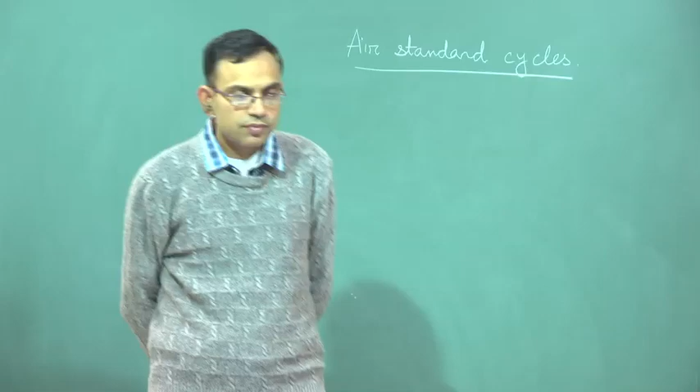So we will start with air standard cycles. Before understanding what these are, I will try to give you a practical example in engineering, and this example concerns something called an internal combustion engine.

IC, for internal combustion. So let us imagine that there is a cylinder with two valves, and then there is a piston. Piston cylinder arrangements have been discussed in detail in this course, so you are familiar with this, except for the fact that this cylinder has certain provisions for taking in and throwing out the fluid contained within it. So it is a cylinder in which the mass of the fluid being circulated can be variable.

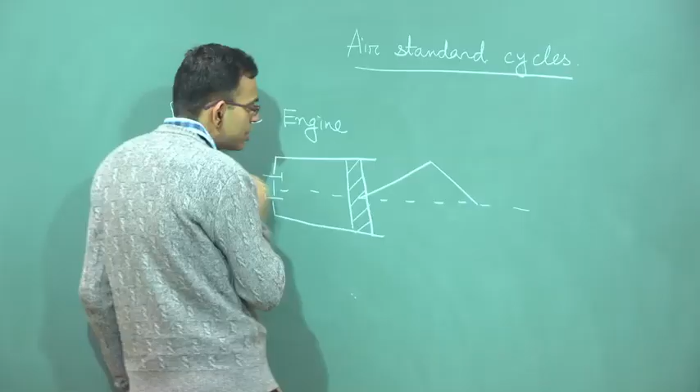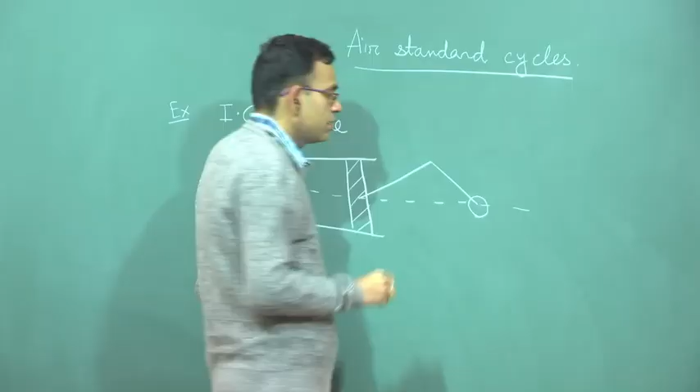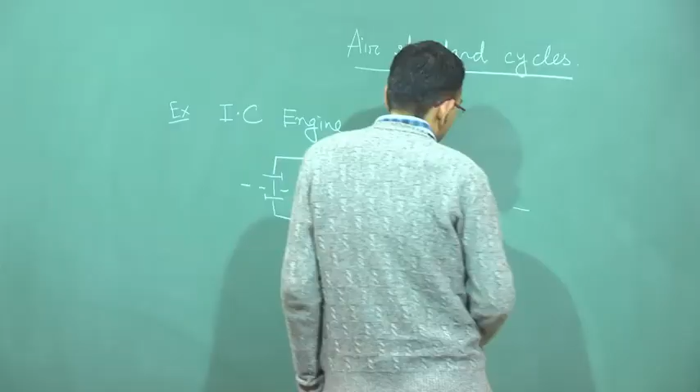So this cylinder has a piston. This piston in turn reciprocates through a mechanism called the crank connecting rod mechanism. What is that mechanism? There is a shaft, a cylindrical piece of rod like this, which in section will look like a circle, and there is a link - this is called the crank - and this is called the connecting rod, a rod that connects the crank to the piston.

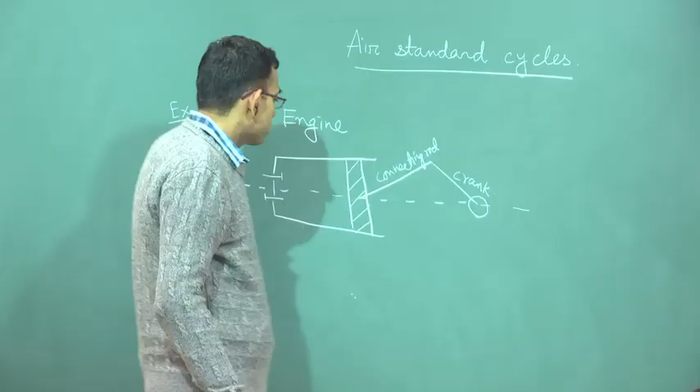Now let us say that this cylinder takes in an air-fuel mixture, a mixture of air and fuel. It could also take only air, but let us take a particular example when it takes a mixture of air and fuel. So how does it take that air and fuel? There is a suction valve that opens up and the air-fuel mixture is drawn into it.

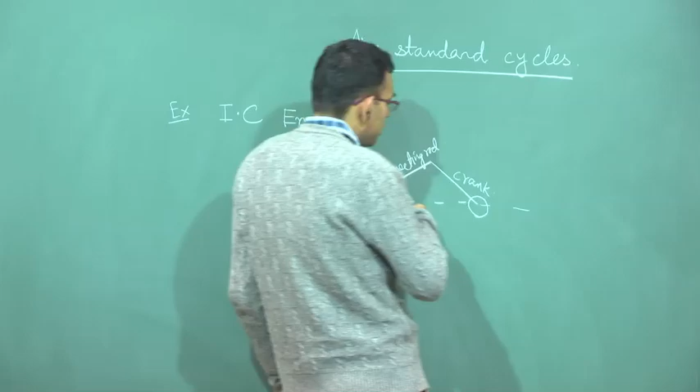So after this suction, what will happen to this air-fuel mixture? Then this air-fuel mixture will be compressed. When the air-fuel mixture is compressed, the whole objective is to raise its pressure and temperature.

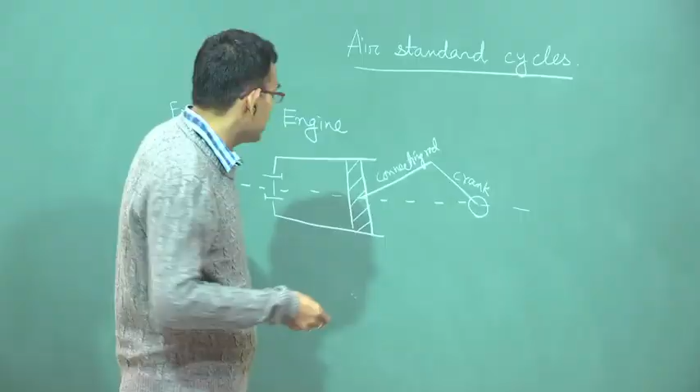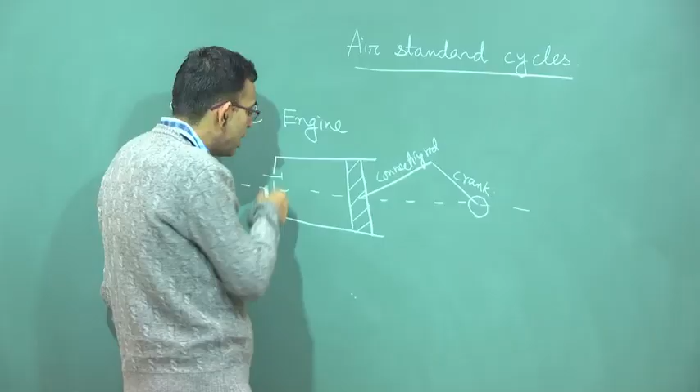Once it is compressed, it is the same air and fuel which was inducted, but now in a highly compressed situation. Remember that when it is compressed, the inlet valve which was kept open during suction is completely closed, so the cylinder is blocked and air cannot move out during compression. During this compression, the gas mixture is compressed to a large extent, and then there is ignition or sparking - what I am saying is what commonly occurs in petrol engines, in petrol-driven vehicles.

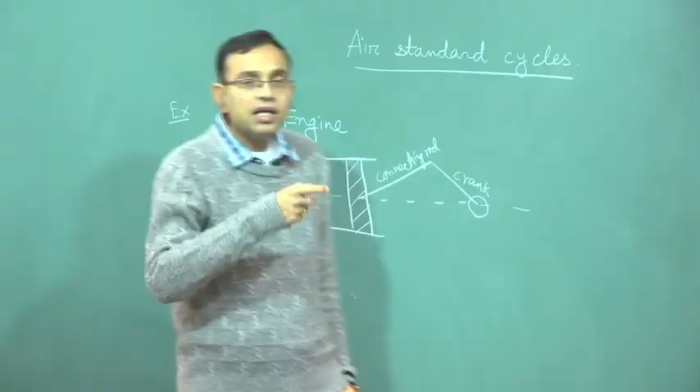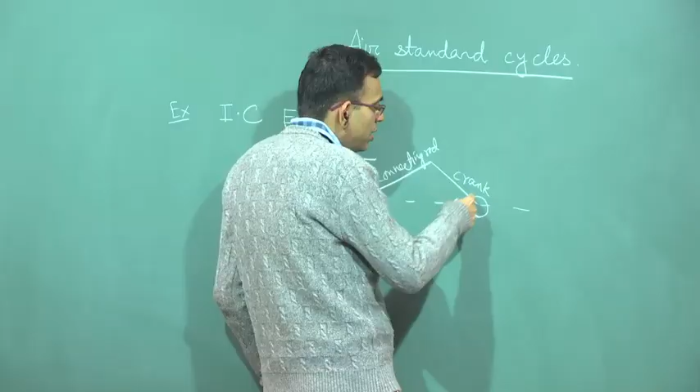Once that combustion takes place, there is a release of energy, and with this release of energy heat is available to the air-fuel mixture. Now with this thermal energy, it has a capacity to do work. So then it will undergo an expansion, and during that expansion there will be a spontaneous revolution. If there is an expansion, this crank will also rotate, and then this crankshaft will rotate, so there will be a spontaneous generation of power. This is called the expansion stroke or power stroke.

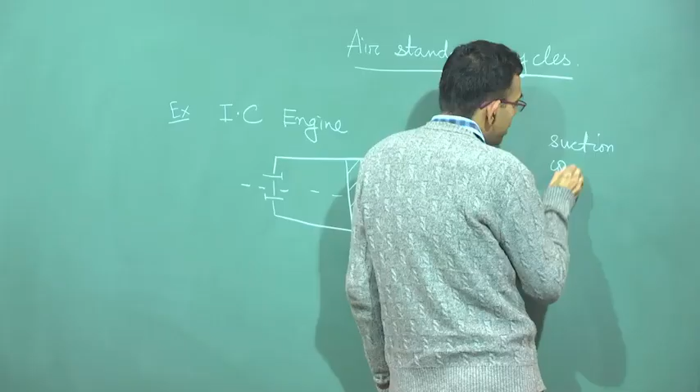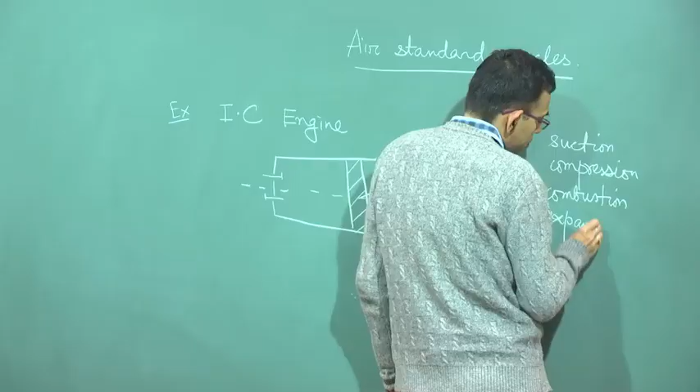So what we have seen is: first suction, then compression - I am just telling you the mechanical steps - then combustion, then expansion, and after expansion you are left with products of combustion from which work has been extracted.

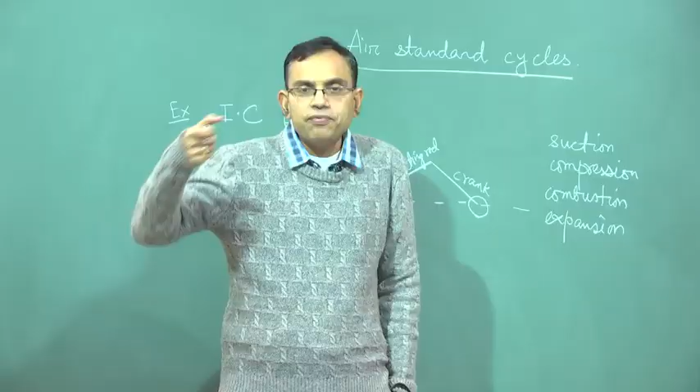So you can leave that and bring in fresh air-fuel mixture with renewed potential of doing work because of the chemical energy. After the combustion and expansion, all the chemical energy in the fuel is utilized to do work, and then you require a fresh air-fuel mixture to run the show. So after expansion, what you then do is there is an inlet valve and there is an exhaust valve.

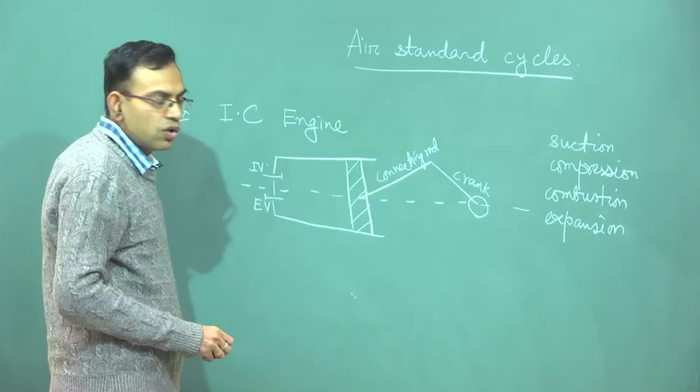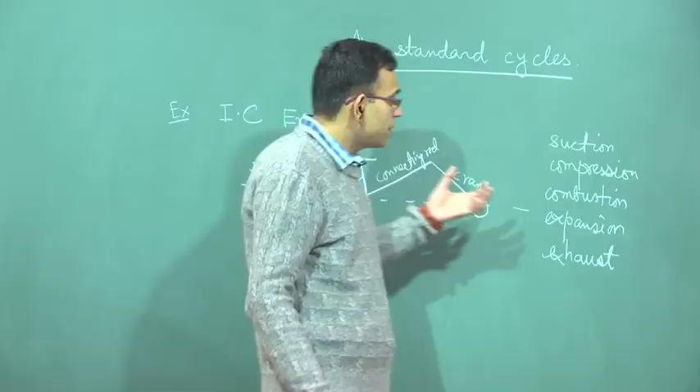So you open the exhaust valve and products of combustion leave the chamber, and then fresh suction starts again. These are the processes which are happening, and this is very much typical to a petrol engine.

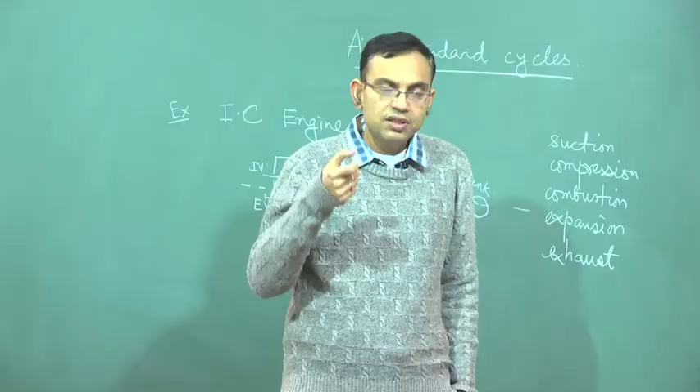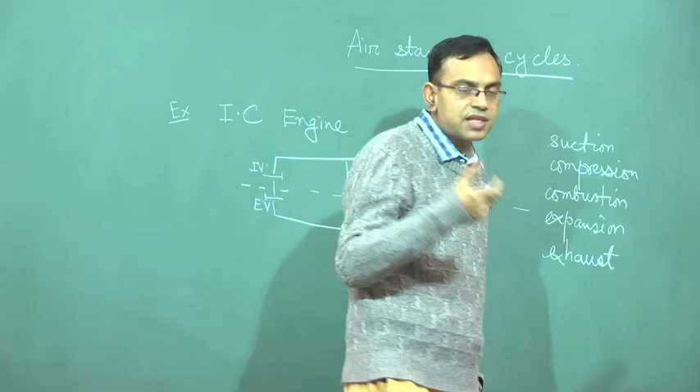In a diesel engine, the basic difference is that instead of pushing an air-fuel mixture, you suck air and compress it, but the compression is so great that at a very high level of compression, if you inject fuel, ignition will start taking place. So air will be compressed instead of an air-fuel mixture. These are technicalities related to practical situations, whether it is air or air-fuel mixture that gets sucked in, but intrinsically these are the common processes which take place, no matter whether it is a petrol engine or a diesel engine.

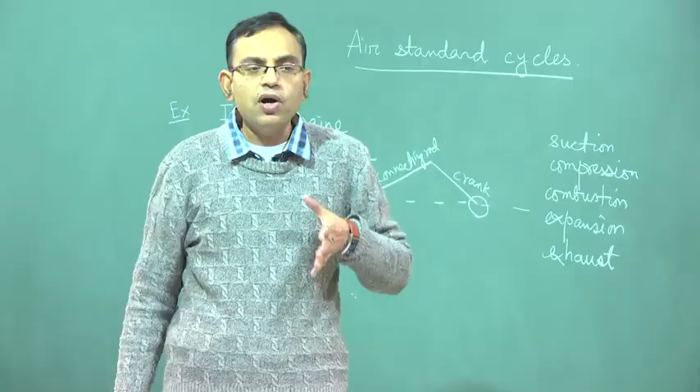Nowadays the traditional distinction is gone, because you can have multi-point fuel injection in modern engines, irrespective of the fuel by which it runs. So it is possible to have combinations of different technologies to run an automobile. Traditionally, whatever used to be the mechanism of the running system of a petrol engine, things have evolved considerably, but no matter what the detail is, this is what constitutes suction, compression, combustion, expansion, exhaust. These are the broad steps that will take place.

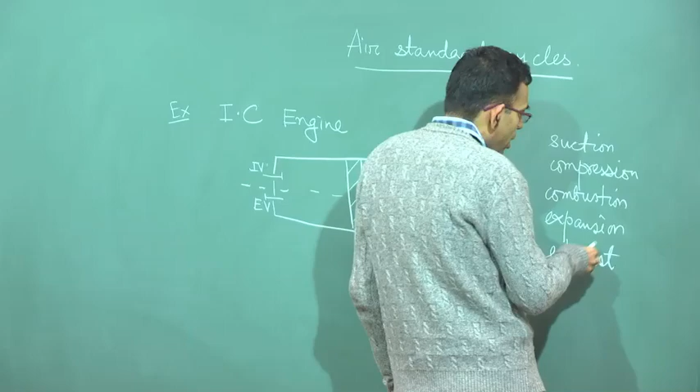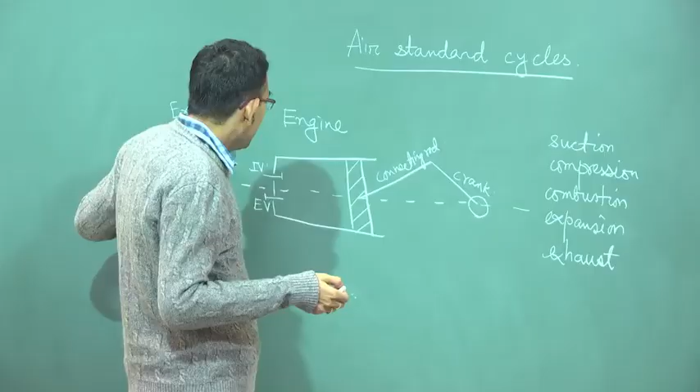So once you have that, the question is how to make a thermodynamic model out of this. What is represented here is a mechanical model. That means you have a mechanical system which takes into account some induction of either air or air plus fuel, then there is combustion, expansion, and then exhaust. So it completes a mechanical cycle.

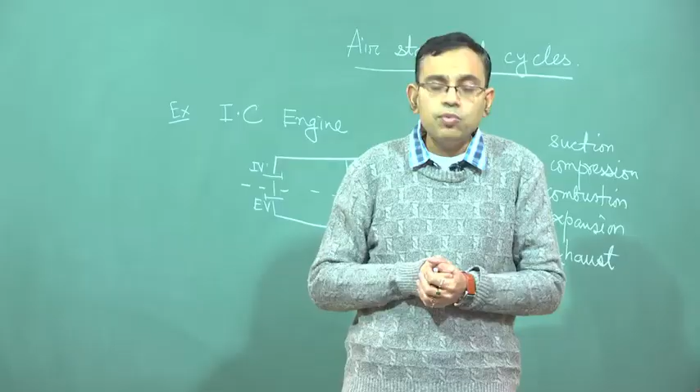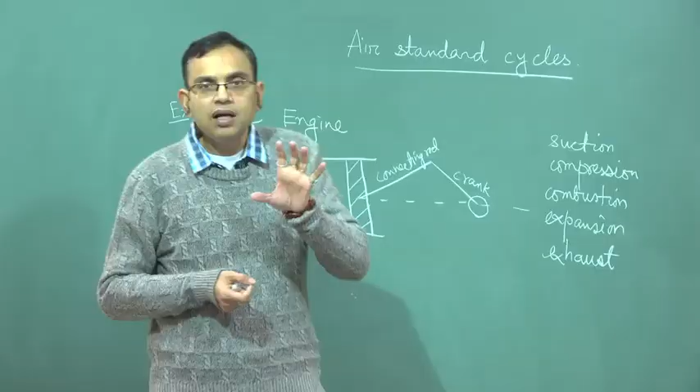Question is, does it complete a thermodynamic cycle? The answer is no. Why does it not constitute a thermodynamic cycle? Because in a thermodynamic cycle you should have the same fluid that is being continuously circulated. Here you have a variable mass within the system that gets circulated, and therefore it is not a given control mass system or even a flowing system with constant mass or a constant rate of mass being transported within the system constituting the cycle. So we can say it is better to call it a mechanical cycle but not a thermodynamic cycle.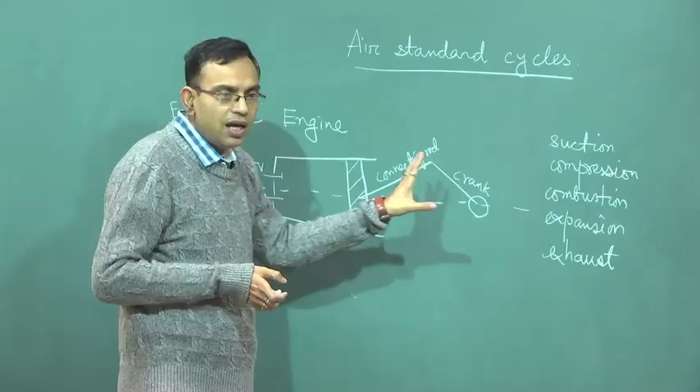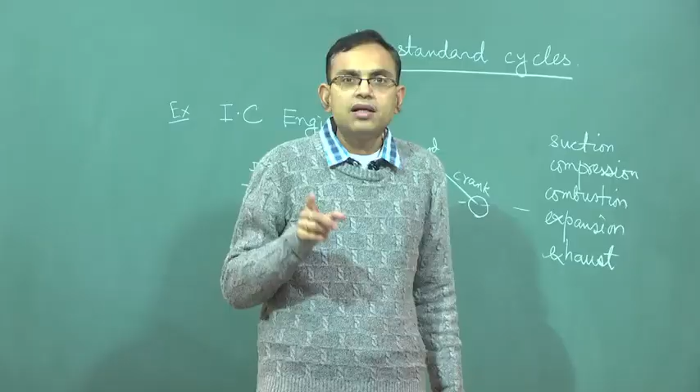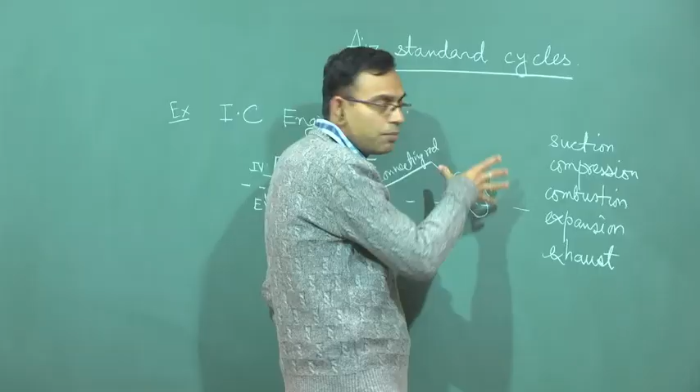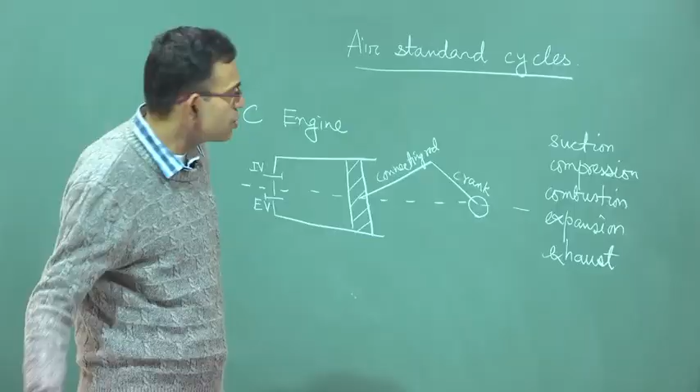But it is possible to imagine an equivalent thermodynamic cycle which grossly represents this behavior and which does not take into account the variable chemical composition of the working fluid. So what it takes into account is that the working fluid is simply air with a constant property that circulates, of fixed mass and composition, and then it constitutes a thermodynamic cycle which is different from what is physically happening, but is a gross representation of the thermodynamic phenomenon taking place. Not just this, there could be other applications which I will talk about later on. It could also be, instead of an internal combustion engine, a gas turbine, which is a different example. I will come to that later on.

But irrespective of what the practical scenario is, if you consider air of fixed mass and composition constituting the thermodynamic cycle with certain processes, then we call it an air standard cycle. So the air standard cycle is a thermodynamic cycle which is used to mimic certain practical industrial processes.

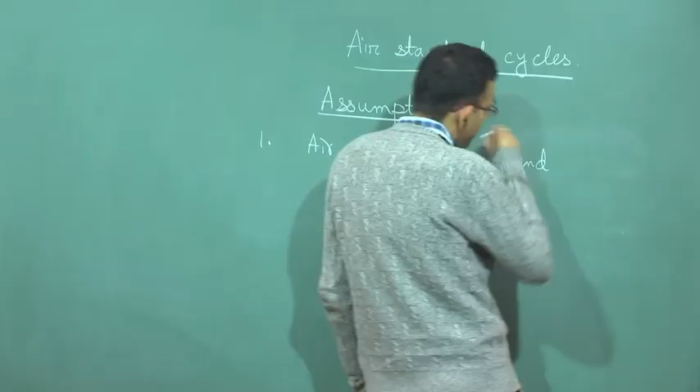Because it is an idealized cycle, it will have certain assumptions. What are the assumptions? Let us first note down. Number one: air of constant mass and composition constitutes the working fluid.

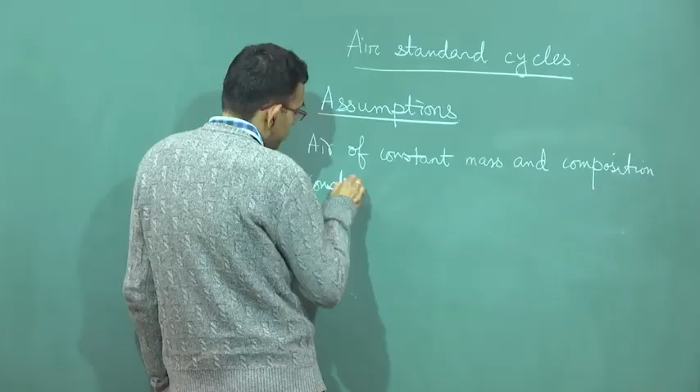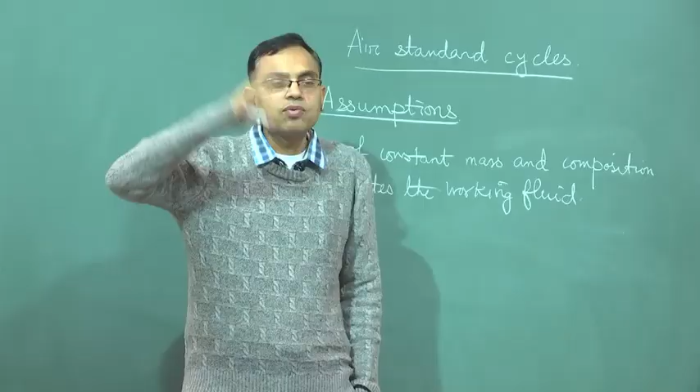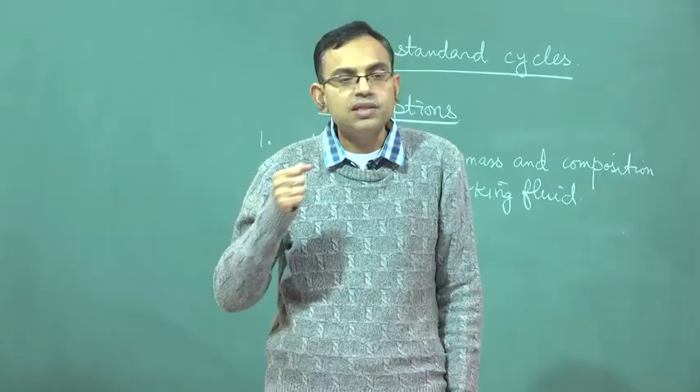So it may be constant mass and composition, but the temperature range is quite large. Why is the temperature range quite large? Because after combustion there is a rapid increase in temperature of the working fluid. So the question is, over such a great range of temperature, it would not actually be legitimate to consider air with constant Cp and Cv, but the air standard cycle is a simplified version of reality when it considers air to be a calorically perfect gas, that means an ideal gas of constant Cp and Cv. Air is treated as a calorically perfect gas.

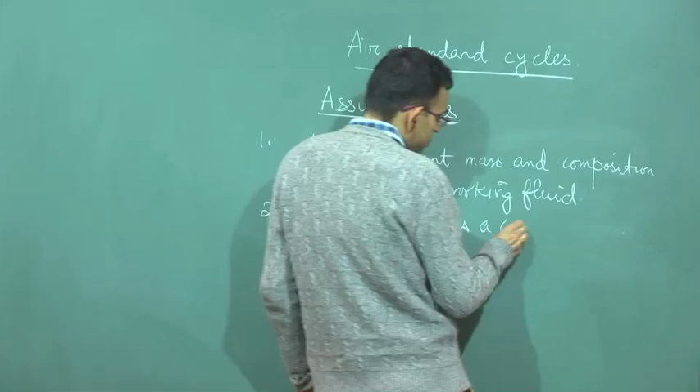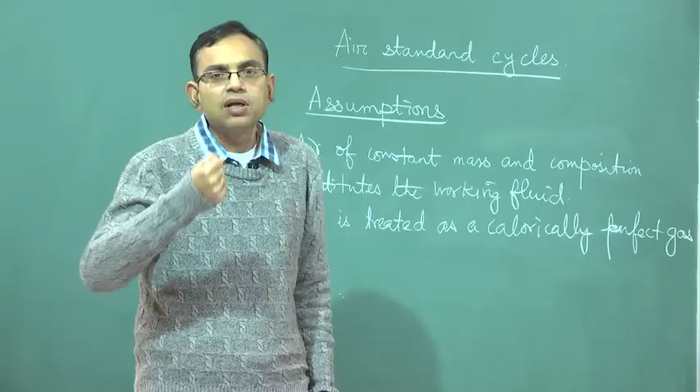Then this combustion cannot be represented in a thermodynamic cycle. The reason is that combustion is a complicated process where the chemical composition gets altered, and with such alteration in chemical composition you no more can consider the working fluid to be of fixed chemical composition. So what you do is treat combustion as an equivalent effect. The equivalent effect is heat addition. So combustion is represented by equivalent heat addition.

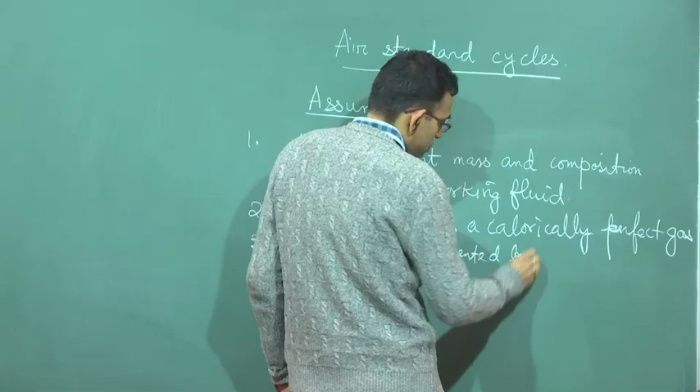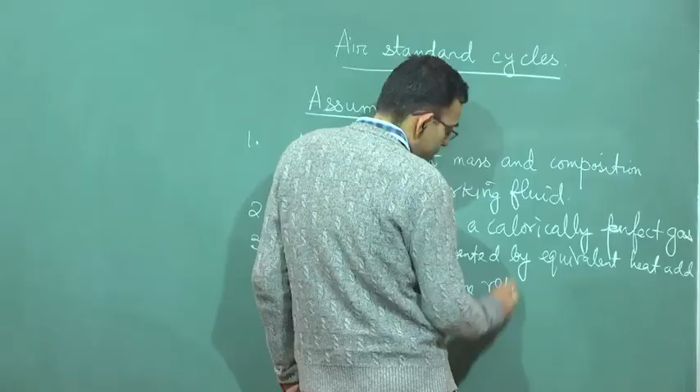Then you cannot also take into account suction, exhaust, etc., because that will change the mass of the system. So, suction, exhaust, etc., are represented by equivalent heat rejection process.

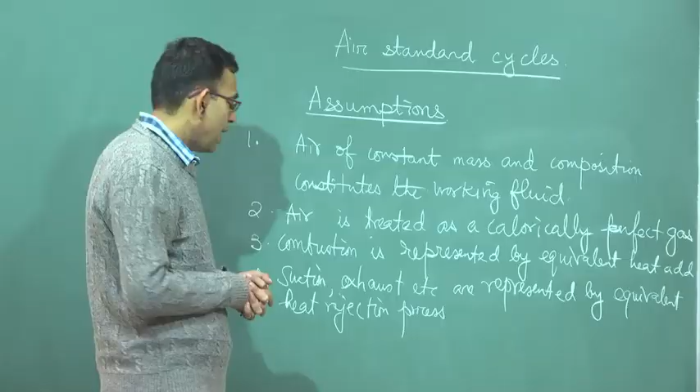We will see later on what is the specification of this heat rejection process. It depends on whether it is an internal combustion engine or a gas turbine. Based on that, the heat rejection process could either be a constant volume or a constant pressure process. And finally, all processes are considered to be internally reversible.

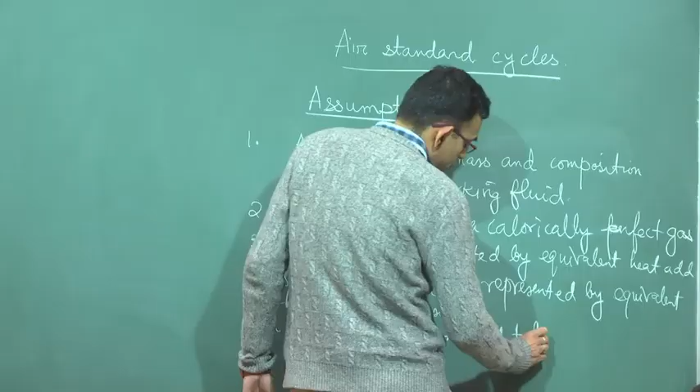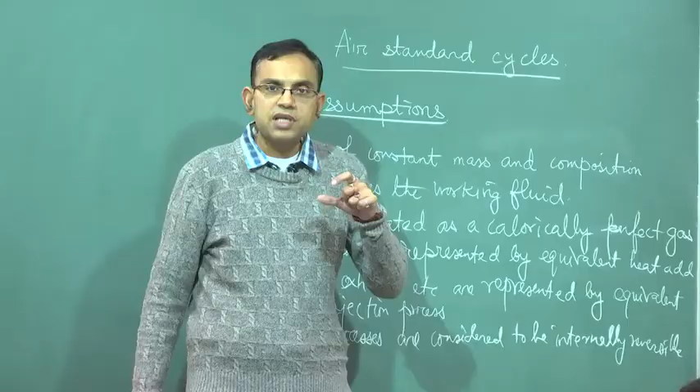This is a sort of obvious assumption, because if the process is not internally reversible, it cannot be represented by a continuous process diagram, and therefore you cannot draw say a PV diagram or TS diagram of such processes. So once you draw a PV diagram or a TS diagram with a continuous line, it must be an internally reversible process, otherwise the intermediate state points are not defined.

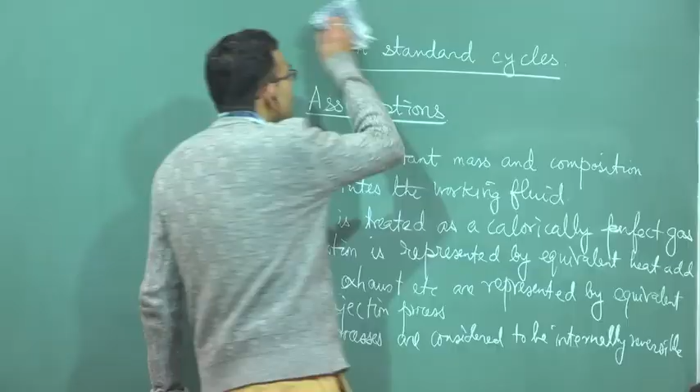So with these assumptions we will learn two important air standard cycles which are relevant to internal combustion engines. The first is the Otto cycle, a classical air standard cycle that is used to model the petrol engine.

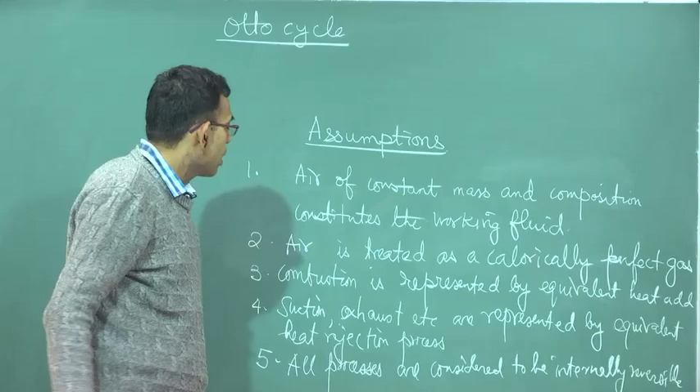So I would erase the assumptions, and for all these cycles what I will do is we will identify the processes and try to draw them schematically in a pressure versus volume, or temperature versus entropy diagram. So we will make a PV diagram and a TS diagram.

So we will start with the compression. Because suction is sort of neglected, we do not take suction into account, we will model it by a heat rejection process. So the first component of the real process which we want to model thermodynamically is the compression process.

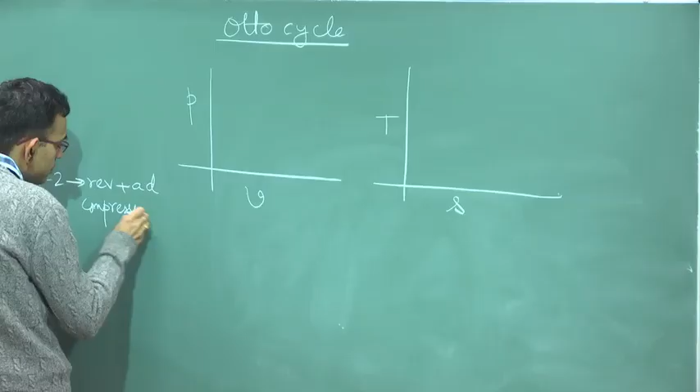So, 1 to 2, reversible plus adiabatic compression. All processes are reversible, internally reversible. So compression is also internally reversible, but it could be any general reversible polytropic process. For air standard cycles representing internal combustion engines, we take this as a reversible and adiabatic process.

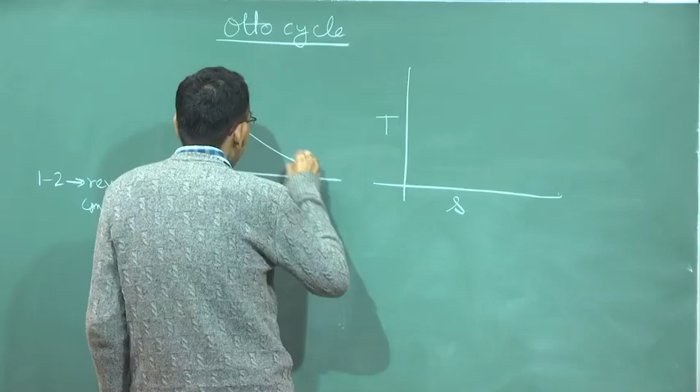So if there is a compression, then the obvious conclusion is that the pressure should increase and the volume should decrease. Then 2 to 3, constant volume heat addition.

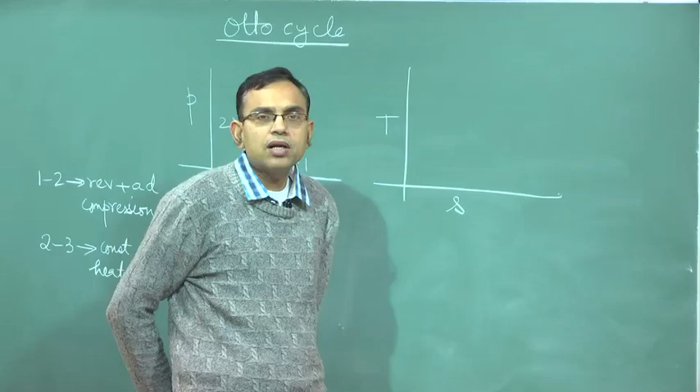So let me draw the same thing in the TS diagram together, that will make it very interesting. So compression, reversible adiabatic compression, what do you think happens at the end of the compression? First of all, reversible adiabatic means isentropic. So at the end of the isentropic process, what will happen to the temperature? Will it increase or decrease? So for all these basic questions, the focus should be thermodynamics, not the practical situation.

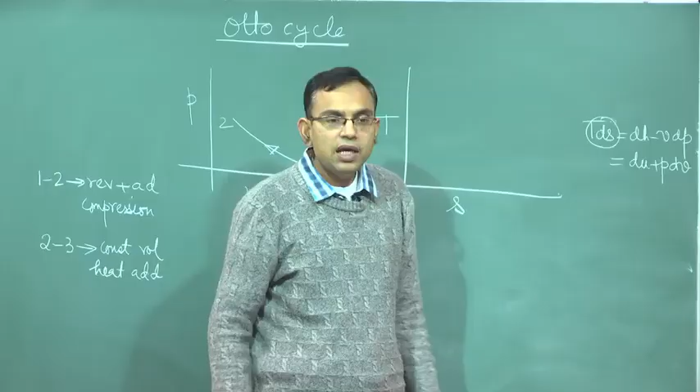So we can use this TdS equal to dH minus VdP, or dU plus PdV, whatever. So TdS is 0 for a reversible adiabatic process. So dH is equal to VdP, and dH is Cp dT for an ideal gas. So that is equal to VdP. During the compression process, pressure is increasing, so VdP is positive, therefore dT is positive. So that means temperature will increase, it will be like this.

2 to 3, constant volume heat addition. So the heat addition in the Otto cycle is modeled as a constant volume process. Why is it modeled as a constant volume process? See, the cycle has something to do with practicality also. In the petrol engine, the combustion or the sparking is almost instantaneous. During that process, the working fluid does not have much of a chance to change its volume. So that is why it is a constant volume heat addition during which the pressure will increase.

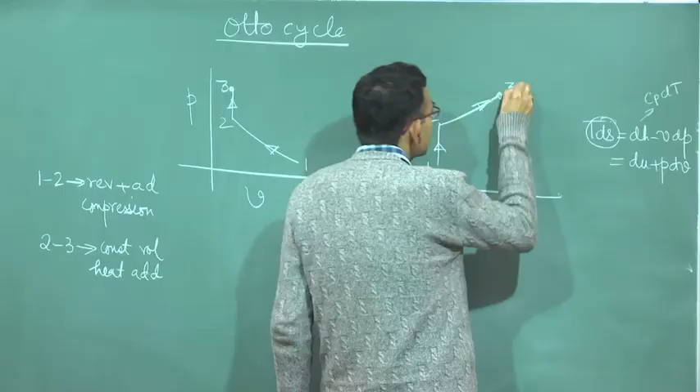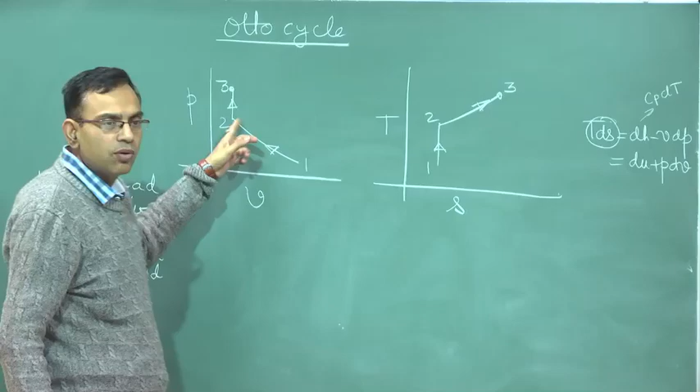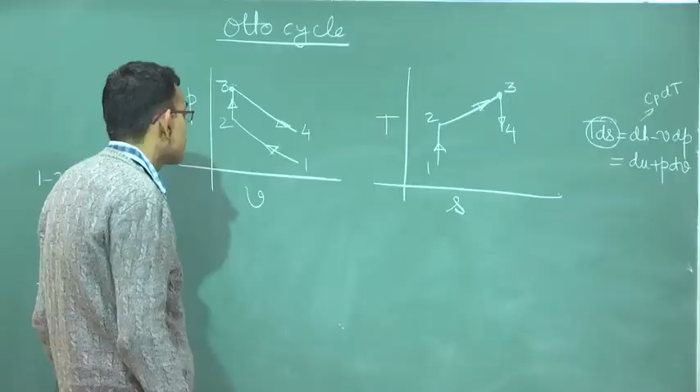Then 3 to 4 is reversible adiabatic expansion, which is the power stroke, reversible plus adiabatic expansion. So in the TS diagram expansion should be opposite to compression, and in the PV diagram also like that. And 4 to 1, this we have said to complete the cycle we must have a process from 4 to 1. We have neglected the suction and the exhaust, so we will replace that by a constant volume heat rejection process. So 4 to 1 we will have constant volume heat rejection.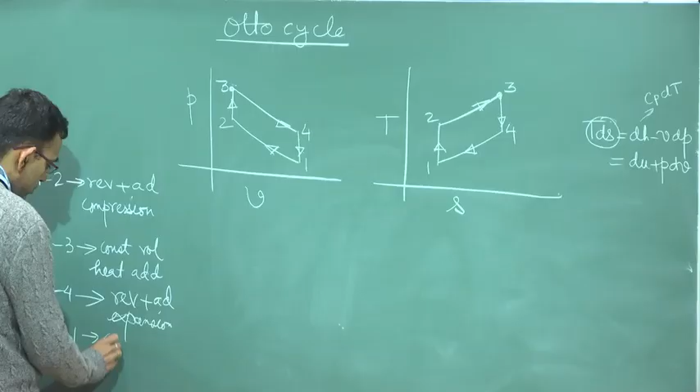Now, why constant volume heat rejection? It could also be constant pressure heat rejection. Had it been constant pressure heat rejection, the advantage would be that you could have got more power out of the system.

Why? Because if it is a constant pressure heat rejection, the process would go up to this point and then you would have had this heat rejection process. So this extra area under the PV diagram you will get as work, which would have been good.

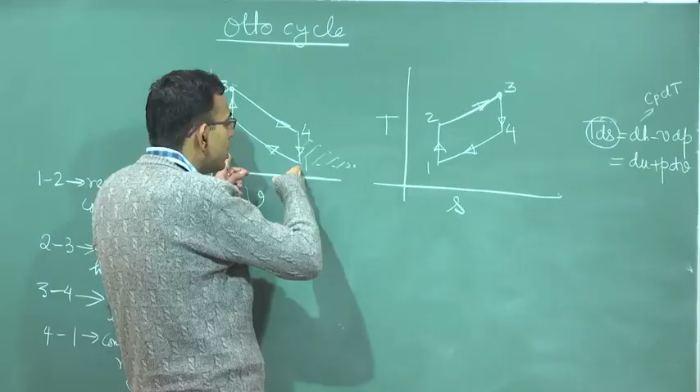But the problem is that in this case the stroke volume, the piston stroke, the difference between V1 and V2, would have been more. With this greater stroke volume you will require a longer cylinder, which will make your car or any automobile more bulky, because it has to accommodate a larger cylinder.

So for compactness of automobiles which run on these thermodynamic cycles, we never imagine that there is a constant pressure heat rejection for those cycles, but constant volume heat rejection. So we will quickly work out the thermal efficiency of these cycles.

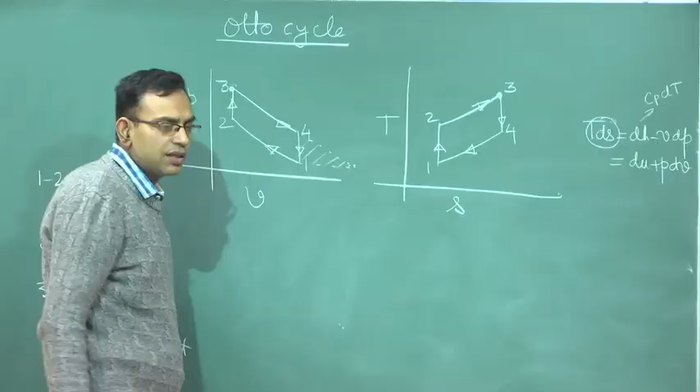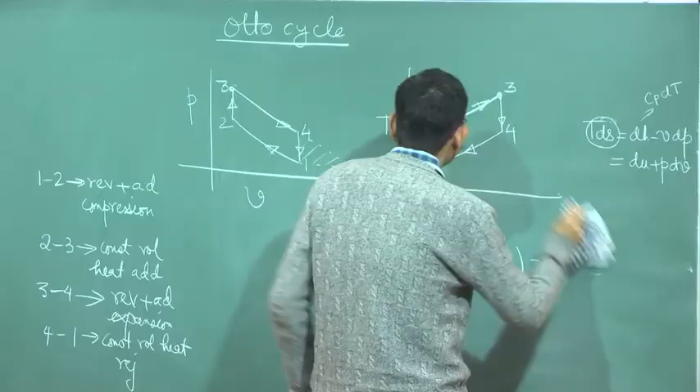So what is the heat addition? You apply the first law of thermodynamics. In process 1 to 2 there is heat rejection, not heat addition - sorry, I'm very sorry, heat addition is zero in 1 to 2, heat addition takes place in 2 to 3. QH is Q23.

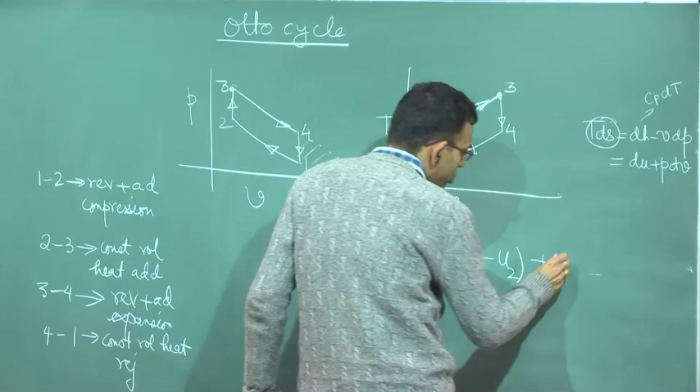That is U3 minus U2 plus W23. W23 is 0 because it is a constant volume process, and U3 minus U2 for constant CV is CV into T3 minus T2. This is QH. What is QL?

QL is, see, when you write the efficiency as 1 minus QL by QH, you have to keep in mind that QL and QH are magnitudes of heat transfer, not with sign. You have to be very careful about this. So QL is mod of Q41.

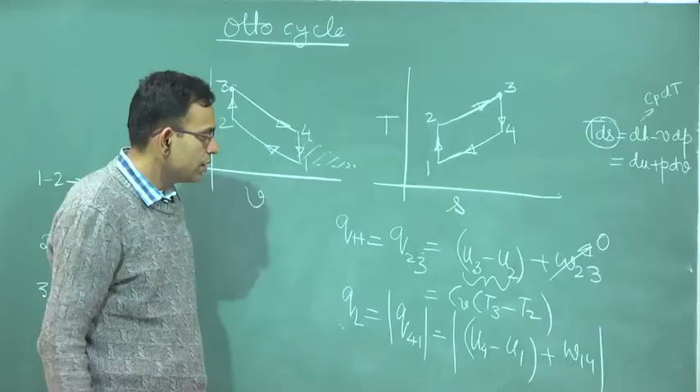That is mod of U4 minus U1 plus W14, or basically mod of U - to be technically correct, the end state is 1, the beginning state is 4. So mod of U1 minus U4 plus W41.

Because U4 is greater than U1, and this W41 is 0 because it is a constant volume heat rejection process, this is CV into T4 minus T1.

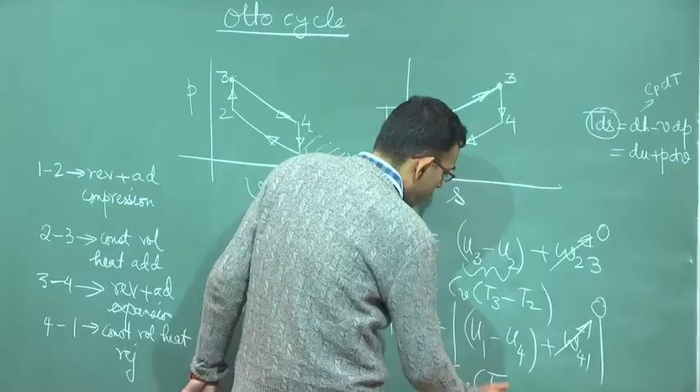So the efficiency is equal to 1 minus QL by QH, which is equal to 1 minus T4 minus T1 by T3 minus T2. So this can be written as 1 minus T1 by T2 into (T4 by T1 minus 1) divided by (T3 by T2 minus 1).

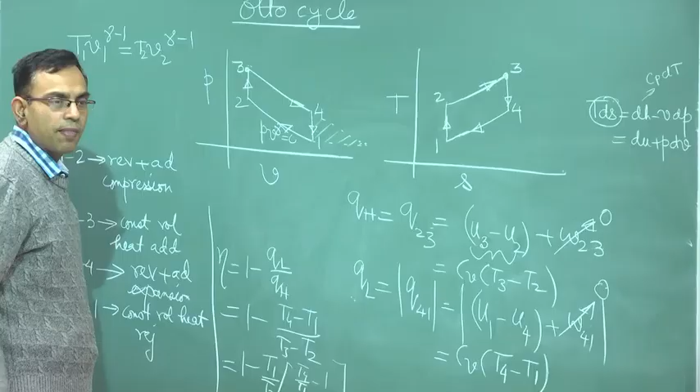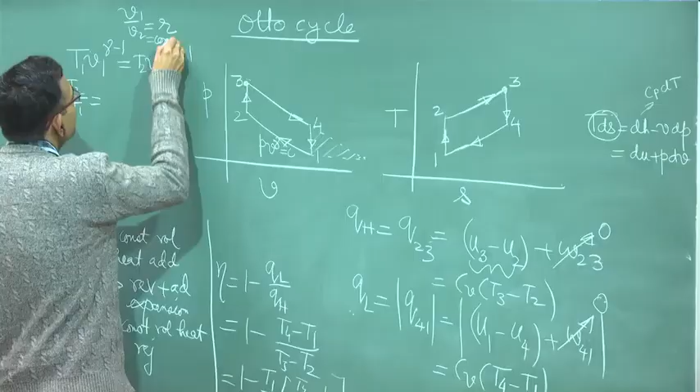So now you can write T1 V1 to the power gamma minus 1 equals T2 V2 to the power gamma minus 1. This process 1 to 2 is PV to the power gamma equal to constant, where gamma is the ratio of specific heats. So T2 by T1 is V1 by V2 to the power gamma minus 1, and V1 by V2 is defined as R, which is called the compression ratio. So T2 by T1 is R to the power gamma minus 1.

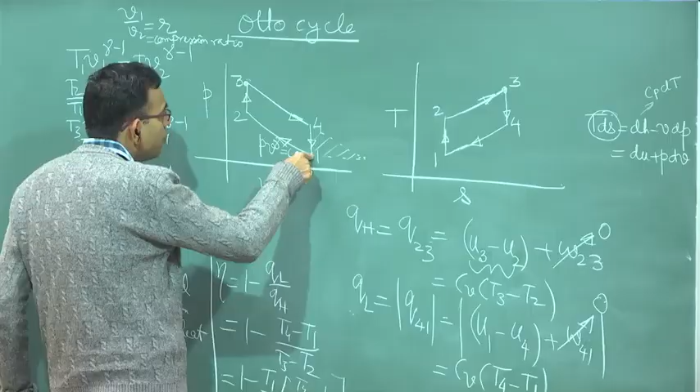Similarly, T3 V3 to the power gamma minus 1 is equal to T4 V4 to the power gamma minus 1. So T3 by T4 is equal to V4 by V3 to the power gamma minus 1. V4 equals V1 and V3 equals V2, so this is also R to the power gamma minus 1.

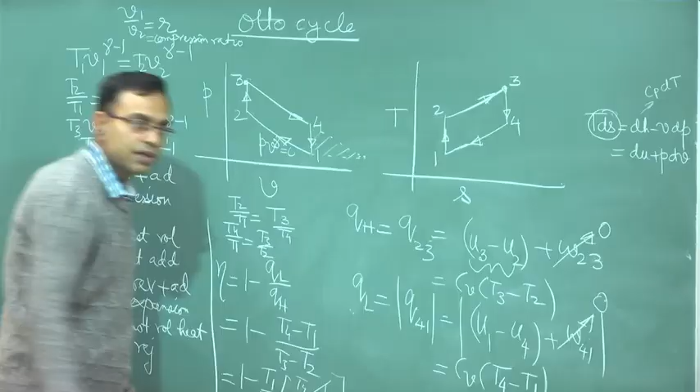Therefore T2 by T1 is nothing but T3 by T4. So you can write T4 by T1 is equal to T3 by T2. These two terms simply cancel, so this becomes 1 minus T1 by T2, and T1 by T2 is 1 by R to the power gamma minus 1. So the efficiency is 1 minus 1 by R to the power gamma minus 1.

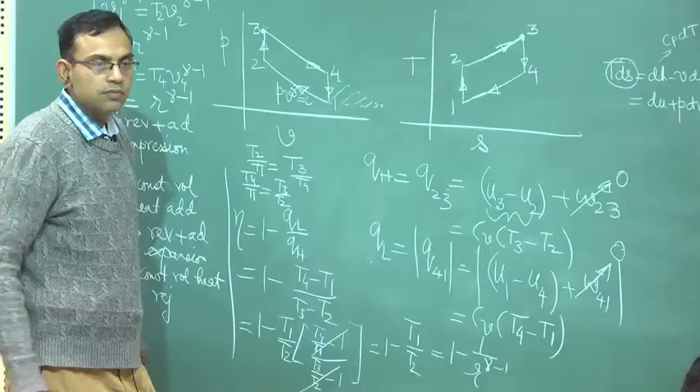So technically if you increase R, the efficiency will increase with R, but you cannot indiscriminately keep on increasing R, because the temperature will spontaneously rise to an extent that automatic self-combustion will occur, since it is already an air-fuel mixture. So the efficiency of this cycle is limited by R.